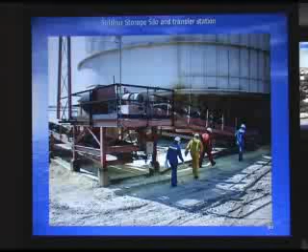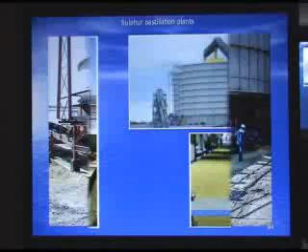Even the silo, was it open? Yeah, the top is open. So what if it rains? It rains. What happens is it drains down, and then there are some drains underneath. Yeah, you're right. They are open silos. See, you can see it is open. See, this part it just drops in.

So rain, snow, anything can happen, but in our design for North America, the one which we are designing, we have a hood here on this one. So only this part will be open, and then this is a chute which goes all the way down. That's what we are designing now.

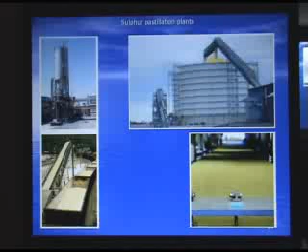So the sulfur doesn't react with water that fast? No, once it's in pastille form, it doesn't dissolve. Okay. It just stays like a pastille. It doesn't dissolve.

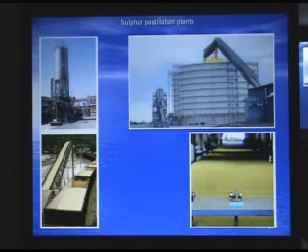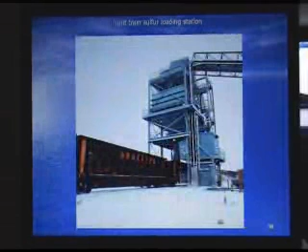Okay, so this goes to the conveyors, and we'll go to the next one. This is where it comes on the conveyor. The conveyor we saw came, and this is where they are loading the train. This is a load out system. We've got a silo here, or a hopper, and this is the operator.

He can see into the rail car he's loading, and he gives the signal for it to move. When the first is loaded, the second one, the third one. There's a unit train of 30, 40, 50 rail cars. Some of them go up to 100 rail cars, and they just load them and ship it out. And you can see it's in Canada, you can see the snow there still. Yeah.

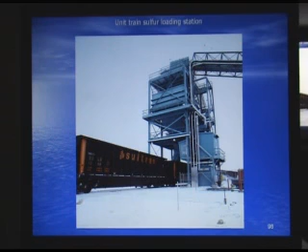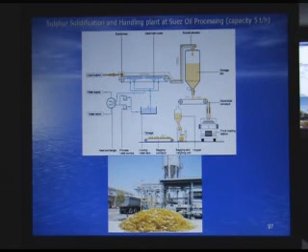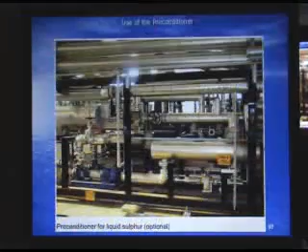And this is the one at Suez oil processing, capacity of 5 tons per hour. In this plant, the sulfur goes into bags. Here you can see they are bagging it, and also transporting it by trucks to the market. This is just a preconditioner before the rotoformer.

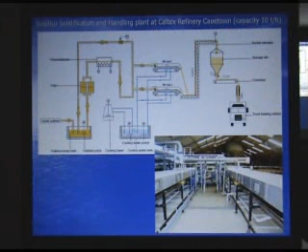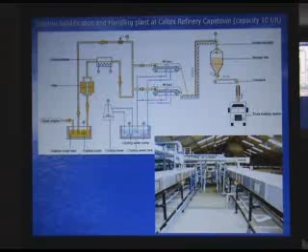Okay, this is a plant with a 10-ton capacity, and they've got 2 rotoformers, basically the same system, and they are loading the trucks, and this is the inside of the plant. These are the rotoformer belts, forming the solid sulfur. This is a third one which has got 3 rotoformers, 15 tons per hour, and they have got 2 silos, same schematic, just loading the trucks.

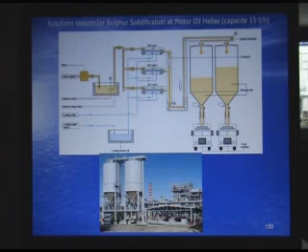This is exactly from North America. This is the process flow diagram for the North American job. We are working in Monrovia too, and whenever it goes to detail engineering we'll be buying 4 rotoformers. This is the tank, and from there this is the molten sulfur, and then it goes into the system and forms into solid sulfur here.

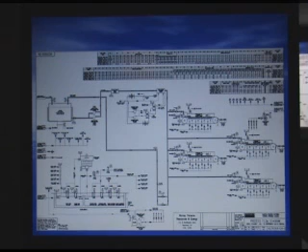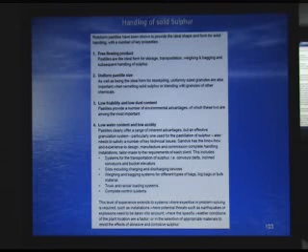These are some of the qualities of the rotoformer. I don't want to go too much into it. These are some of the properties of why we do solid sulfur and how it helps the environment and all that.

Now the last thing is, every plant has to be maintained. So you need maintenance equipment, and this is the last part of this. Just a few more minutes and we are done. Where we buy equipment to maintain, like you have rotating guys here, you have pumps, compressors, you need to maintain. You got motors, you need to lift them, take them away. So we need the hoists and cranes and bridge cranes.

So this just gives you an example of a bridge crane, how it works. The bridge crane, that's why it's called a bridge crane, because there's a bridge here. If you take this as east-west direction of the plant, it can be inside or, this is an outside one, but it could be inside too. On the coker we saw outside, but in ConocoPhillips and BP both, we are buying bridge cranes which are inside the module in Alaska, and they're going to be inside the building.

So if this runs east-west, there's a second crane girder running on this side. This is the north-south side, where this particular carriage can run north-south, and this is the height side where you lift and drop. So anywhere in the plant where you are, you can lift and move wherever you want to go with a bridge crane. That's why it's called a bridge crane, because you have a bridge.

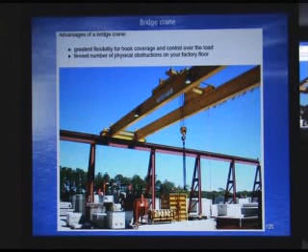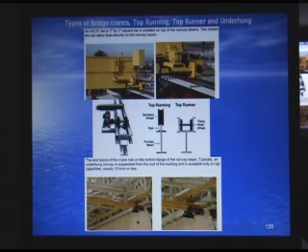Okay. Then the bridge cranes are designed so many different ways. I just want to give you a flavor that this is the main girder of the building, this is the rail, and this is the wheel of the bridge. And here they got electrical connections because they need power to run the motors, all different motors for lifting or moving the crane or the bridge. This is also showing an actual plant where we got the bridge crane working.

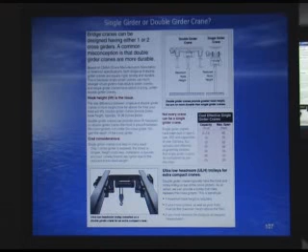Here it gives you just a flavor of, if you use a double girder bridge, you have this much of lifting you can do, this much of space available. If you have very limited space, like in Alaska with all those modules, they need less space, and then you could go with a single beam, and you can see the lifting space is only this much. So you cut down from there to there, depending on what space you have.

Now we have a BP job, they forgot about the bridge crane. They say, well, the bridge crane will work, it's fine, great. And now somebody who is working on an Alaskan job would know it, that now they realize that the bridge crane would need more room. To do that, they have to increase 5 feet of the module, and that is $2.5 million. So now the client is crying. He says, why didn't you tell me that you needed this thing before? So I had to go and get a bridge crane, and we are working on that to cut down the space for that module to make it lower space type of lifting.

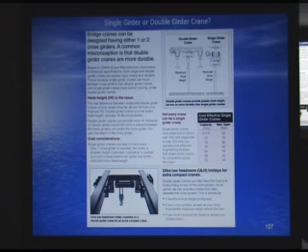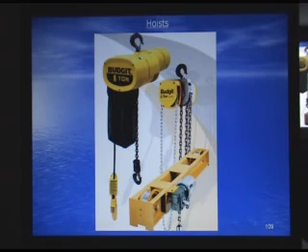These are some of the components of the bridge crane. Okay, these are the hoists which are always used. Every plant you go, you will see them everywhere. You lift pumps or small parts, valves, any maintenance you need, you just need them all the time. These are different kinds of hoists, but these are the chain hoists. You can see the chains, which is manual. Then we go more sophisticated with electric hoists, which are this electrical type.

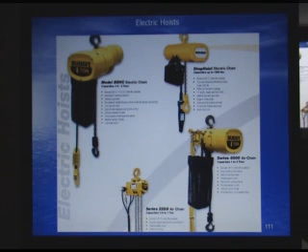We got electric motor. But you can't use electric in all the petrochem plants or refineries because they are explosive. You got explosion-proof motors, which get very expensive. So we use pneumatic type. So this is showing pneumatic. You got air coming in, there's a pneumatic motor. So we don't need electric. We can go pneumatic also. It depends upon the plant design and the area classification of that particular unit. These are more components of the hoist.